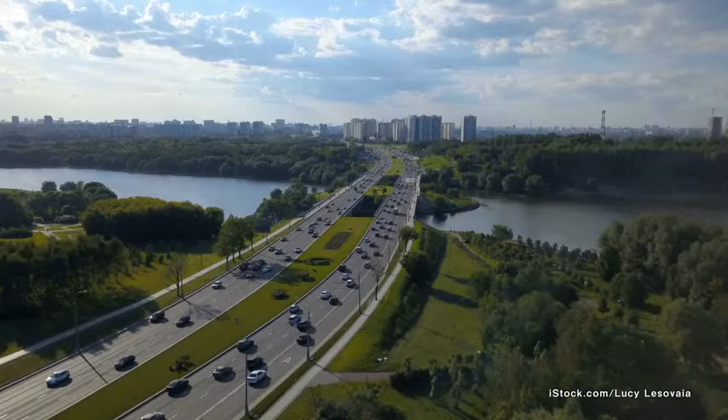Roads play a significant role as part of essential and basic social infrastructure for livelihoods and economic activity. Coupled with other environmental improvements, road infrastructure has invigorated economic activities and dramatically enhanced people's daily lives.

As part of JICA's aim to build foundations that improve user safety and amenity and support economic activities in developing countries, it has supported numerous road developments, including main road repairs, grade separation at intersections, and bridge construction and replacement.

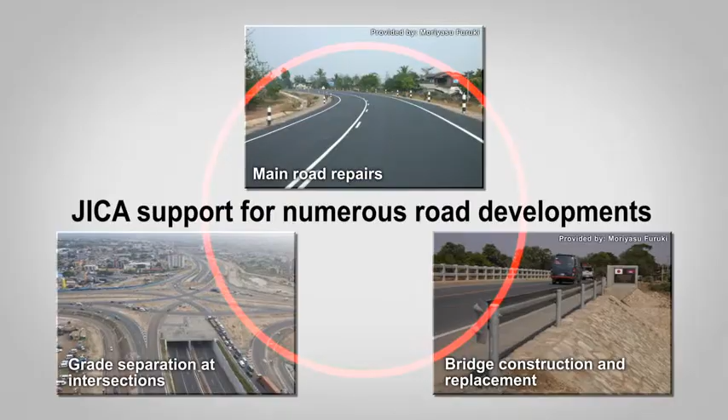Road pavement consisting of an asphalt mixture or concrete slabs not only distributes and transmits weight of vehicles as heavy as 50 tons to the soft ground, but also allows for smooth and safe driving on a flat surface.

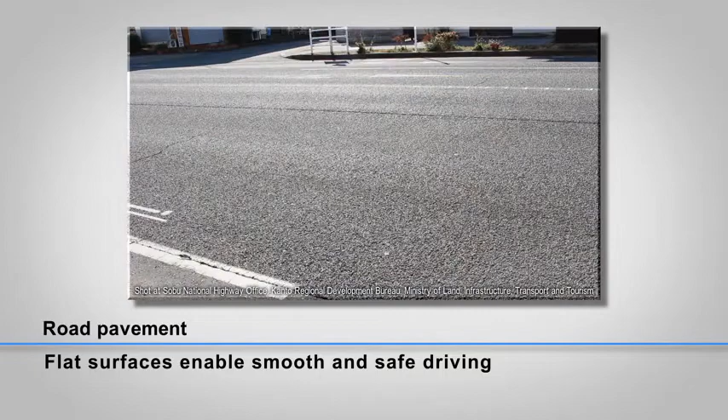To achieve these objectives, asphalt pavement consists of a surface course and binder course made of an asphalt mixture, and below that, a base course and a sub-base course. It is the subgrade that supports these pavement layers. Road design in Japan defines the subgrade as being up to a depth of 1 meter below the pavement.

Similarly, concrete pavement consists of a cement concrete slab and a base course overlaying a subgrade.

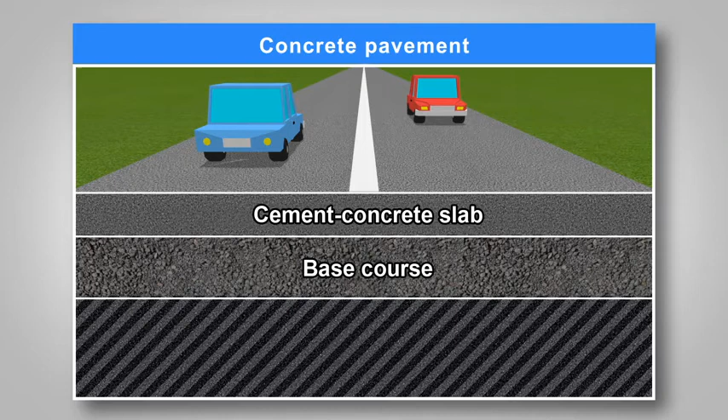Road pavements, which support the heavy traffic of today, are damaged by vehicle traffic, freezing and thawing, rainwater, etc., and their service performance gradually declines. Developing countries often experience harsh natural conditions and traffic conditions, resulting in early pavement damage and impaired ability to carry traffic.

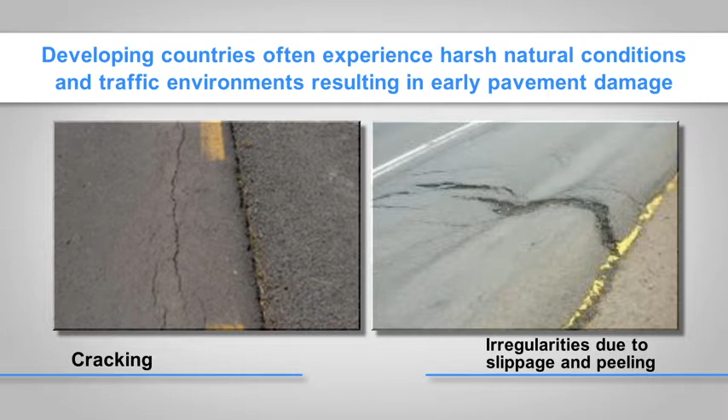Examples in the case of asphalt pavement include surface cracking, irregularities due to slippage and peeling, alligator cracking arising from interconnected cracking, and potholes in the pavement surface.

Typical road pavement includes asphalt pavement and concrete pavement. But in developing countries, with the need for rapid road development and numerous opportunities for widening existing roads, asphalt paving, which is faster to construct, is preferred.

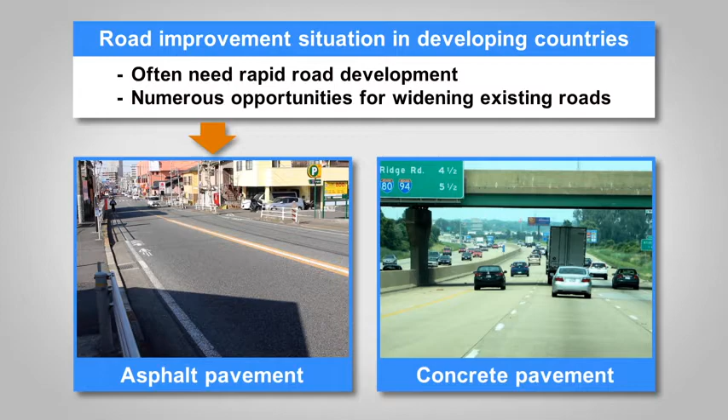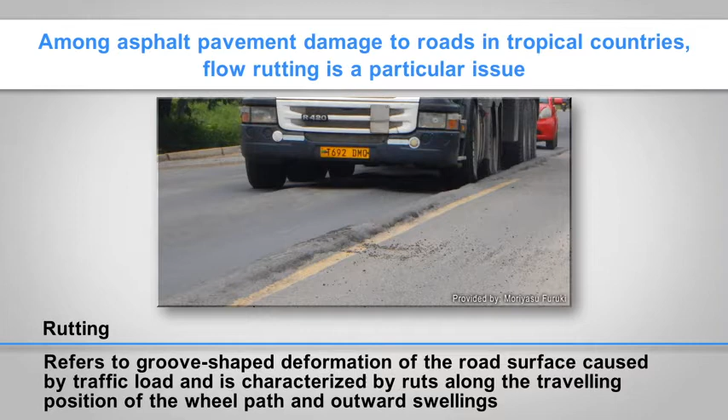Among asphalt pavement damage to roads in tropical countries, flow rutting is a particular issue. Rutting refers to groove-shaped deformation of the road surface caused by traffic load. It is characterized by ruts along the traveling position of the wheel and outward swellings. It is a problem that appears sometimes as early as a few months after completion of the asphalt paving.

The asphalt mixture that makes up the surface course and binder course is produced by mixing asphalt and filler with aggregate, such as crushed stone and sand. There are times, however, when traveling vehicle load causes the asphalt mixture laid on the road to deform like soft candy. This condition is known as flow rutting.

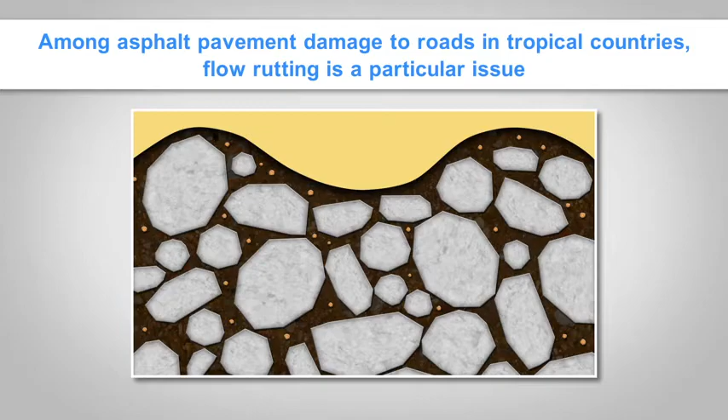Why does flow rutting occur?

Determining distribution of aggregate gradation and asphalt type and content in the asphalt mixture is called the mix design. Sometimes, however, there are inappropriate mix designs or inadequate quality control at the asphalt mix manufacturing plant. For external factors, the most common causes are intense stress on the road surface due to heavy traffic and softening of the asphalt caused by high temperatures.

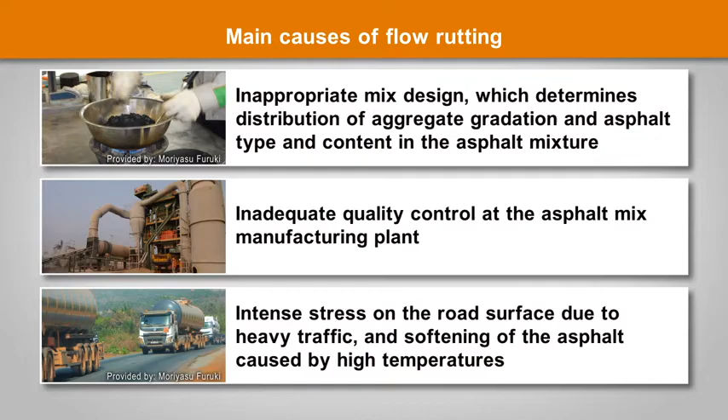For tropical countries, solving this flow rutting problem is a matter of urgency in order to make vehicle travel safe and comfortable.

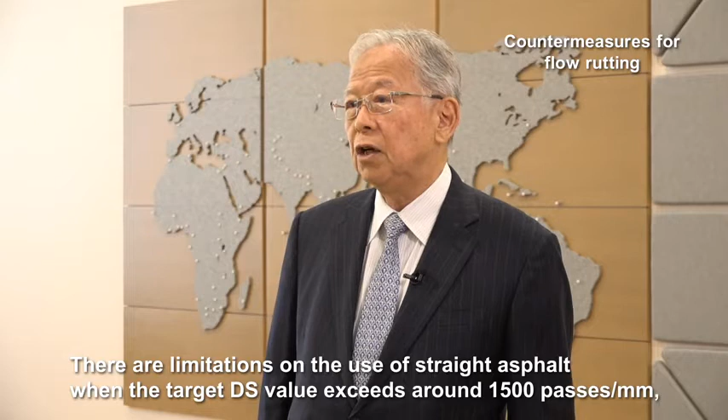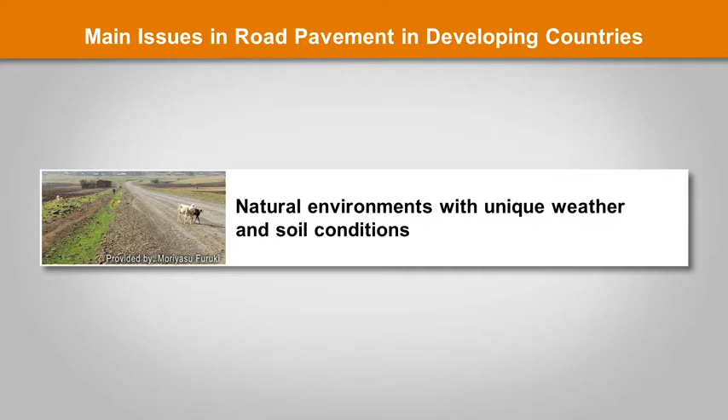Main roads in many developing countries experience natural environment conditions with unique weather and soil conditions, including temperature and rainfall, and traffic conditions such as increases in large vehicles and traffic volume. In some construction circumstances also, it is sometimes difficult to secure materials of consistent quality.

In terms of design, the design standards adopted in the partner country are not always adequate from the perspective of preventing flow rutting.

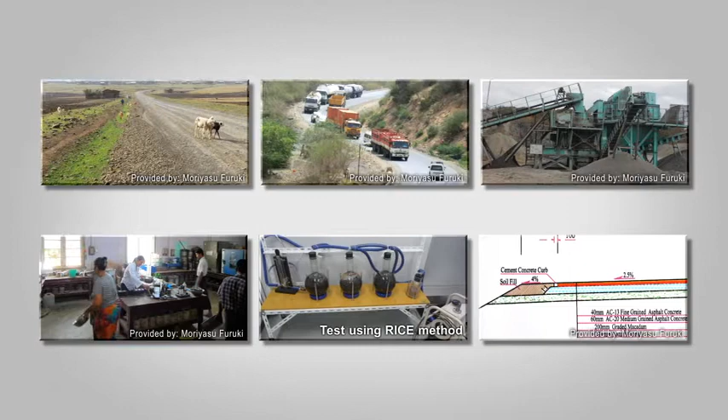In addition, taking percentage of air voids, for example, even if a test exists with the same name, the definition may vary. Or, like drainage design, measures differ by country. Unexpected pavement faults and damage could result if the partner country's natural and social environments, design philosophy and operation methods are not adequately understood.

To address these issues, it is desirable to conduct preparatory surveys for design standard features and differences in design and construction conditions in developing countries, and take appropriate measures at the design and construction phase.

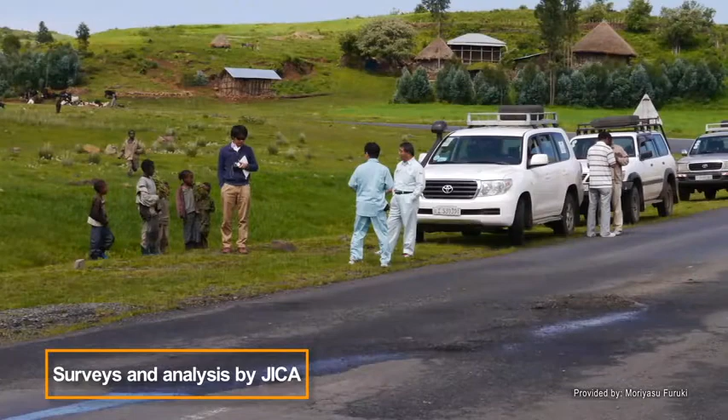To this end, JICA has implemented comprehensive surveys and analysis of the types and causes of pavement damage in various developing countries, and has conducted basic research to improve rut resistance. JICA compiled the information and knowledge gained from these projects, and in February 2020, made proposals in the form of the Road Pavement Handbook for JICA Grant Aid projects.

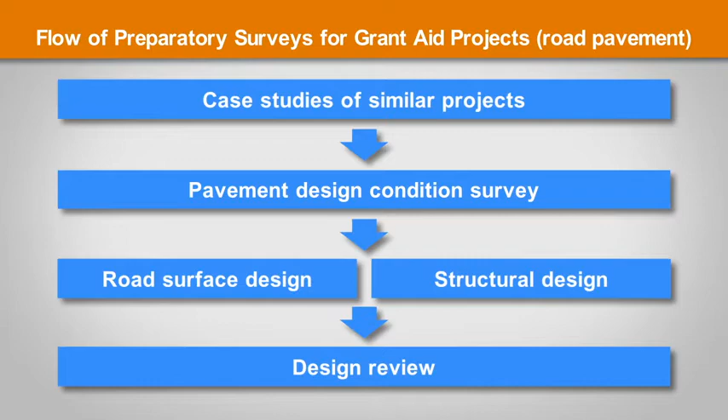Among preparatory surveys for grant aid projects, those relating to road pavement are generally implemented in the following sequence: data collection of similar projects, and pavement design conditions survey, road surface design, structural design, and design review.

In a pavement design conditions survey, local conditions, related pavement materials, and information from similar projects are collected, and the necessary investigation for pavement design is conducted, enabling a design that considers factors such as soil conditions.

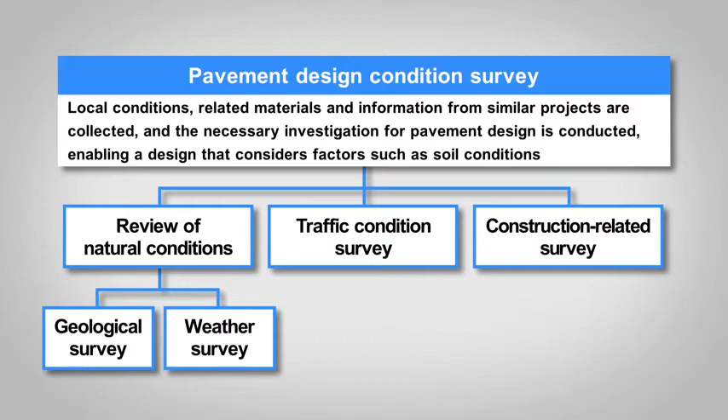Survey items include a review of natural conditions, including geological and weather surveys, traffic conditions, and a construction-related survey. Apart from calculating the California Bearing Ratio, CBR, of the subgrade, the geological survey checks groundwater level, the existence of problem soils such as dispersive soil and expansive soil, and soft ground.

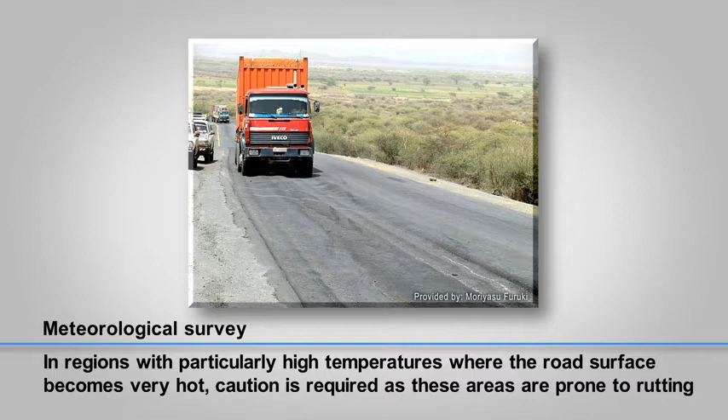The weather survey covers rainfall and temperatures in the project area. In regions with particularly high temperatures where the road surface becomes very hot, caution is required as those areas are prone to rutting.

The traffic condition survey covers traffic volume, travel speed and axle load on the target roads, and estimates future traffic volume. Caution is required in developing countries where there is a particular tendency towards a drastic increase in the volume of large vehicles.

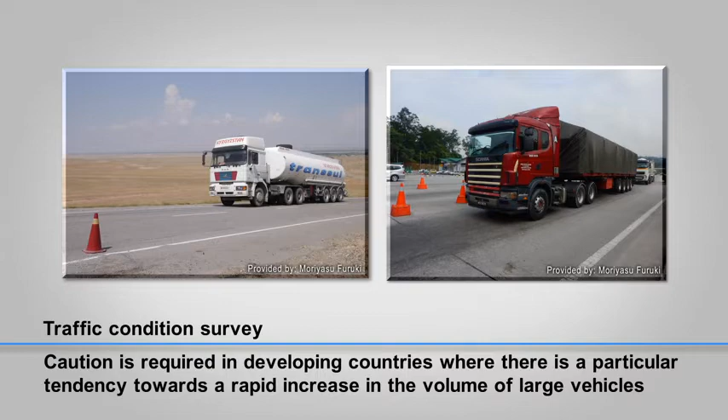The construction-related survey covers a site survey and local contractor interviews regarding paving materials, such as aggregate, that are locally accessible, and available asphalt plants.

In the design of asphalt pavements for tropical countries, flow rutting is the main issue for road surface damage, and poor drainage is the main issue for structural damage.

Road surface damage can be prevented by clarifying the required performance for the road surface at the road surface design stage, selecting asphalt and making decisions on surface course materials, including the necessity for modifiers, aggregate quality and gradation to satisfy this performance, and then designing and manufacturing the mix.

The term road surface design refers to one of the unique features of pavement design in Japan.

Structural damage first requires appropriate implementation of design condition surveys, including CBR tests and axle load surveys. Then, based on the traffic load, subgrade conditions, climate conditions, and material conditions obtained from these surveys, structural calculations are made to satisfy the specified strength throughout the specified design period, and a structural design that appropriately determines material and thickness for each pavement course is conducted.

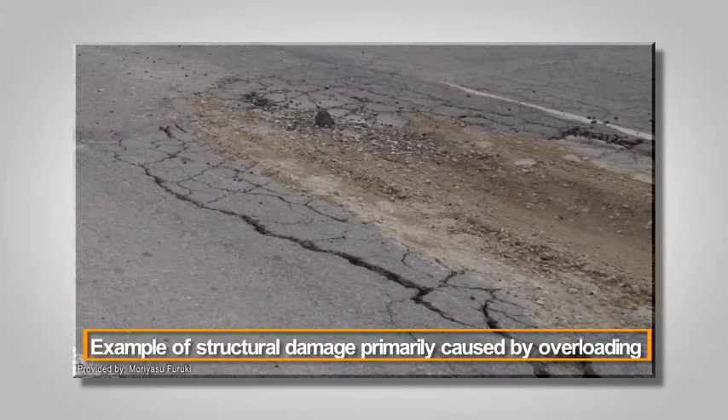Even with proper design, repeated heavy traffic over a long period can cause fatigue failure in the pavement. Groundwater and inappropriate maintenance also allow intrusion of water into the pavement from pavement cracks or gutters. This results in loss of bearing capacity of the base course and subgrade, leading to damage.

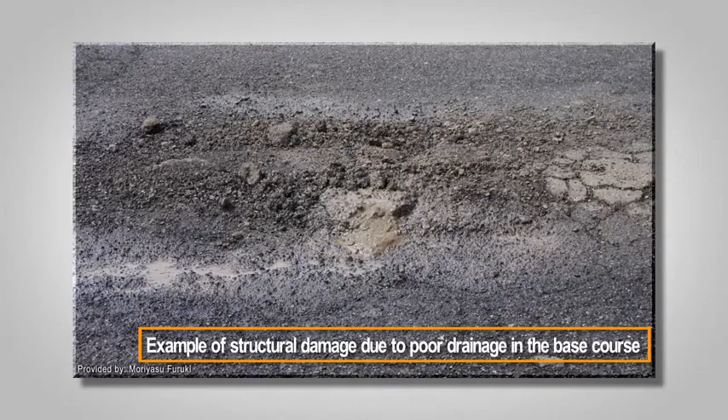Within pavement design, it is road surface design that is most important to counter flow rutting. At JICA, we recommend using dynamic stability, target DS value, which is commonly used in Japan as one of the standard performance indicators against flow rutting of pavement.

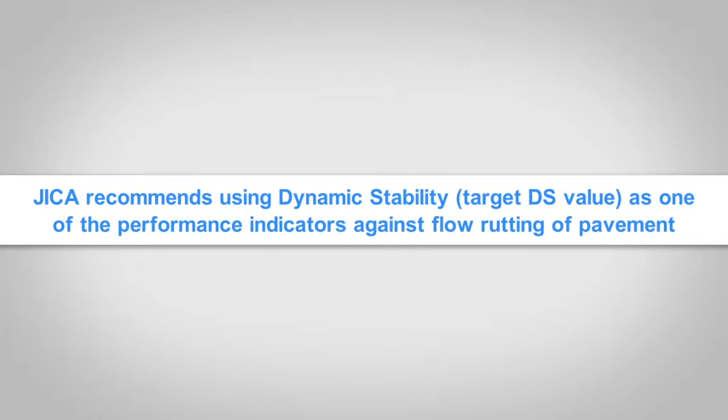This is a method to obtain target estimated DS values based on actual results in Japan using the target amount of rutting and service period, and external factors such as heavy vehicle traffic, wheel load, driving speed, road surface temperature, etc., and to refer to them when designing the asphalt mix.

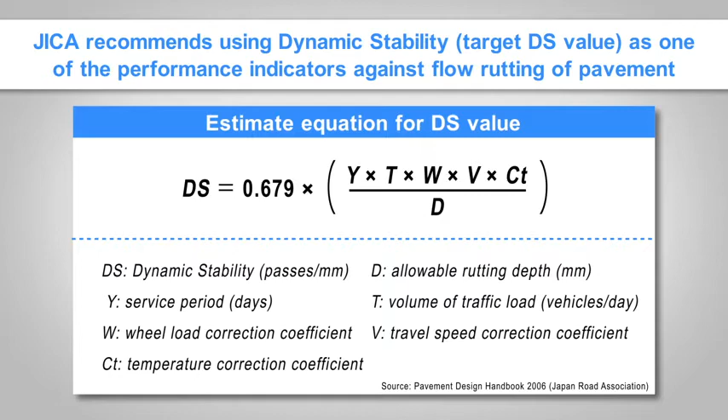In addition to the estimated DS value calculated in this way, the target DS value is determined based on a comprehensive judgment that takes into account information on the pavement of surrounding roads and special circumstances such as heavy vehicles entering and exiting from roadsides and local traffic congestion.

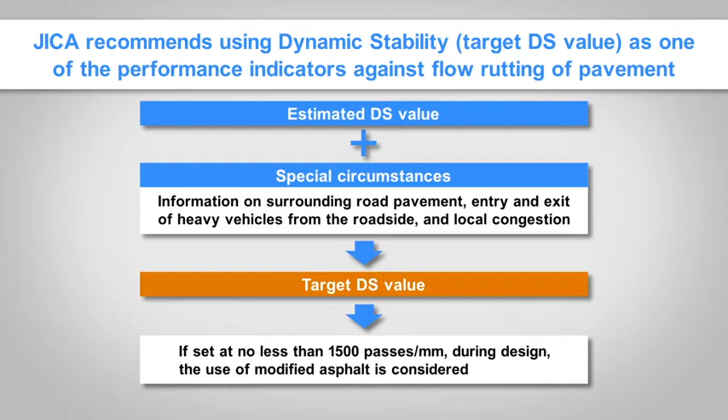Based on this, when the required performance, target DS value, is set at no less than 1500 passes per millimeter, during design, the use of modified asphalt is considered.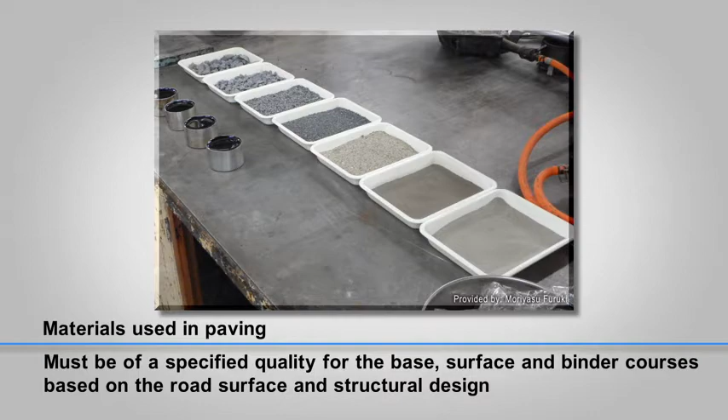Materials used in paving must be of a specified quality for the base and sub-base course, surface and binder courses based on the road surface and structural design. For that purpose, at the construction preparation stage, the construction contractor will implement material tests, mix design, and construction management.

In order to ensure that the asphalt mixture exhibits the performance required in the road surface design, such as flow resistance, we need to pay attention to detail in the mix design.

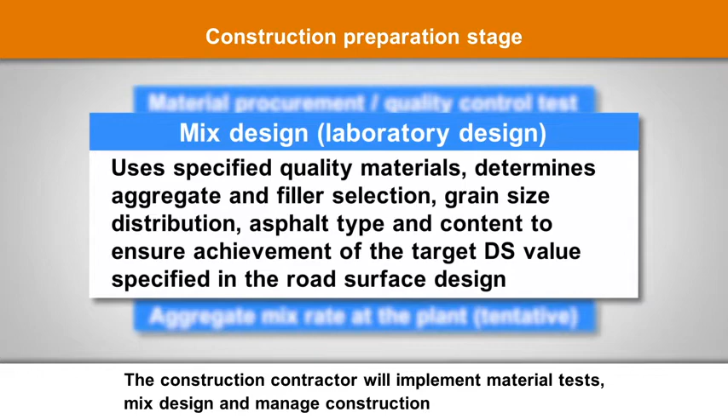The mix design uses specified quality materials and determines aggregate and filler selection, grain size distribution, asphalt type and asphalt content to ensure achievement of the target DS values specified in the road surface design.

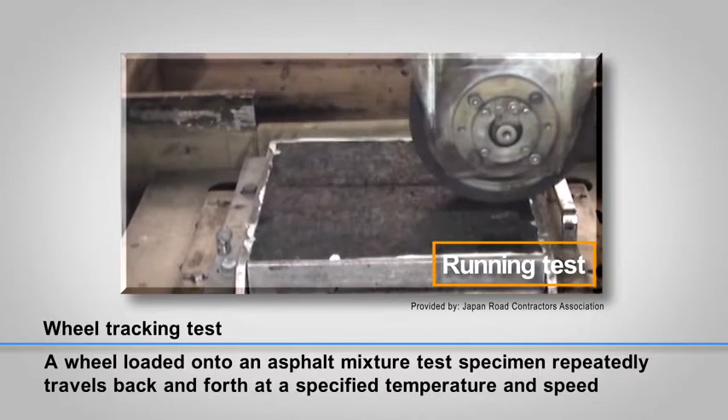Japan's mix design method is conducted as a combination of the Marshall stability test and wheel tracking test. The wheel tracking test is a test that checks dynamic stability. The test uses a small, hard rubber wheel loaded onto an asphalt mixture test specimen that repeatedly travels back and forth at a specified temperature and speed to calculate the number of wheel passes required for a 1 mm increase in rutting in the specimen.

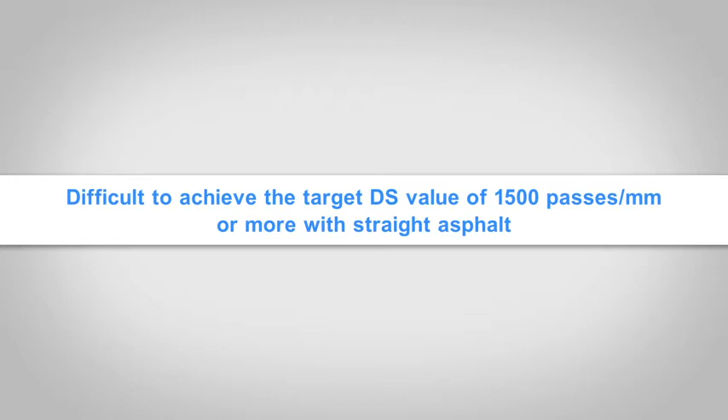Under Japan's test, it is difficult to achieve the target DS value of 1500 passes per millimeter or more with straight asphalt. However, using modifiers increases paving costs, so initially the requirement is to use given materials and increase the DS value as high as possible without compromising the workability and durability of a mixture.

In many road projects outside of Japan, pavement work costs account for over half the project costs, so economic paving is a major concern for the contractor.

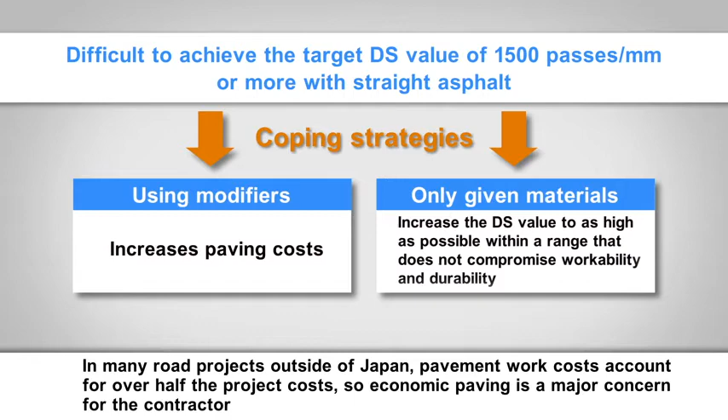The flow resistance and durability of an asphalt mixture varies considerably depending on grain size distribution in the mix. Coarse aggregate does not pass through a 2.36 mm sieve, and fine aggregate passes through a 2.36 mm sieve, but not a 75 micrometer sieve.

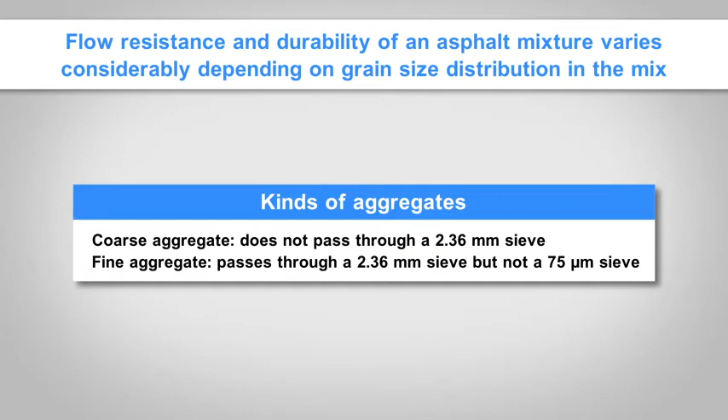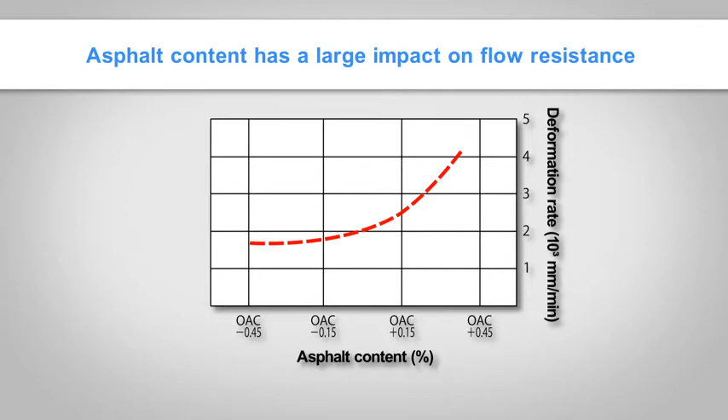and asphalt is interposed between them to make the bond strong, the mixture will be highly resistant to flow. Asphalt content has a particularly large impact on flow resistance and must not be too high. Generally, the optimal asphalt content for the Marshall stability test in Japan is likely to cause flow rutting in the tropical country's environment.

Some decrease of asphalt content should be considered. However, care must be taken because too little asphalt sometimes causes construction problems such as fine cracks and a tendency for loss of durability.

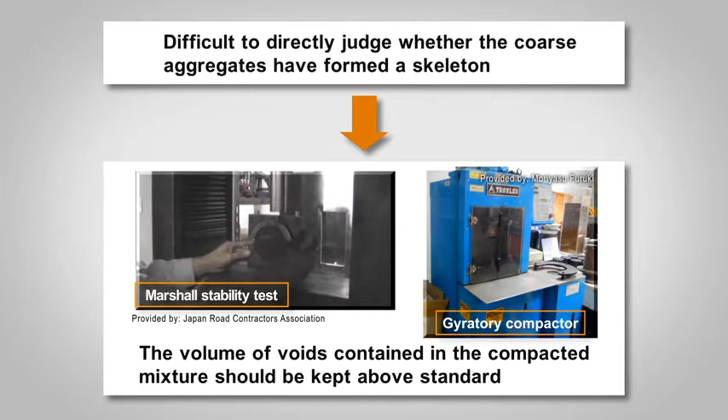It is difficult to make a direct judgment as to whether the coarse aggregates have formed a skeleton, so the volume of voids contained in the compacted mixture should be kept above standard using the Marshall stability test method or a machine called a gyratory compactor.

Aggregate shape is also important, particularly for fine aggregate. As natural sand is close to a spherical shape, its use is undesirable in terms of good flow resistance, so artificial sand should be mixed in.

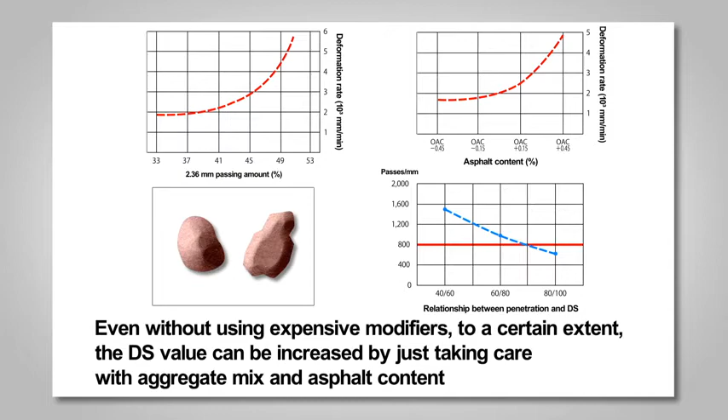In addition, it is very useful to use low penetration asphalt, such as 40 to 60 penetration. In this way, even without using expensive modifiers, to a certain extent, the DS value can be increased by just taking care with aggregate mix and asphalt content.

When wheel tracking test results do not yield the target DS value and modified asphalt is used, care needs to be taken with the type of modified asphalt and asphalt plant type.

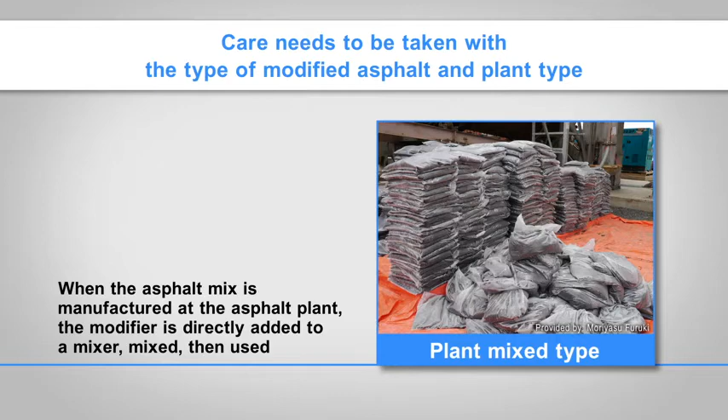There are two types of modified asphalt: premix and plant mix. The premix type is made by an asphalt manufacturer, where the modifier is mixed in the straight asphalt in advance at the plant. Conversely, for the plant mix type, when the asphalt mix is manufactured at the asphalt plant, the modifier is added directly to a mixer, mixed, then used.

When using modified asphalt, there are countries where the premix type is not available in the market. Furthermore, when considering the plant mix type, the modified asphalt manufacturing method varies depending on the type of asphalt plant.

There are two types of asphalt plants: batch type and continuous type. In Japan, batch type asphalt plants are commonly used, where each material is weighed one batch at a time in a weighing tank, and then mixed in a mixer.

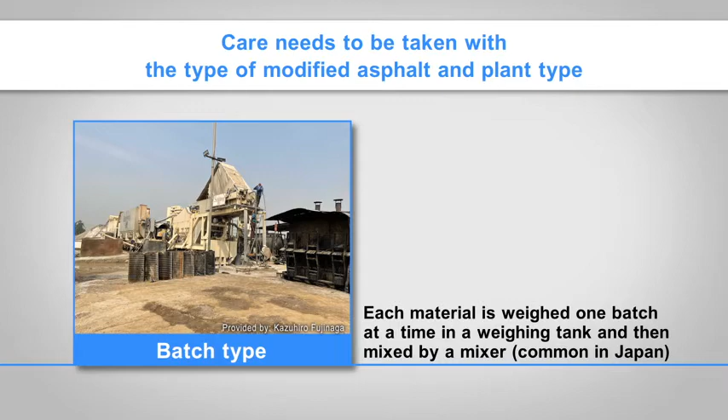On the other hand, in many African countries and Australia, the continuous type is commonly used, where each material is continuously supplied at a specified flow rate. Manufacturing modified asphalt using the continuous type requires equipment modifications.

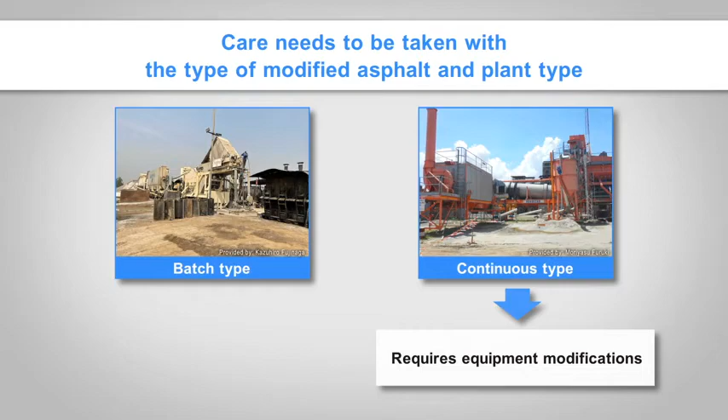Based on these considerations, when modified asphalt is expected to be used, information needs to be collected in advance, including the asphalt procurement situation at the project site and the available plant type.

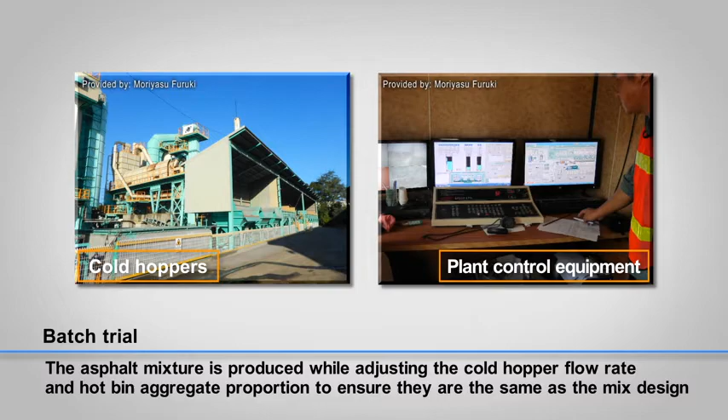Next, a batch trial is conducted based on the mix design, where an actual asphalt plant is used for a trial mix of materials. For the batch trial, the asphalt mixture is produced while adjusting the cold hopper flow rate and hot bin aggregate proportion to ensure they are the same as the mix design.

As with the mix design, the required performance tests such as Marshall stability test and wheel tracking test are conducted to confirm that the required performance is assured.

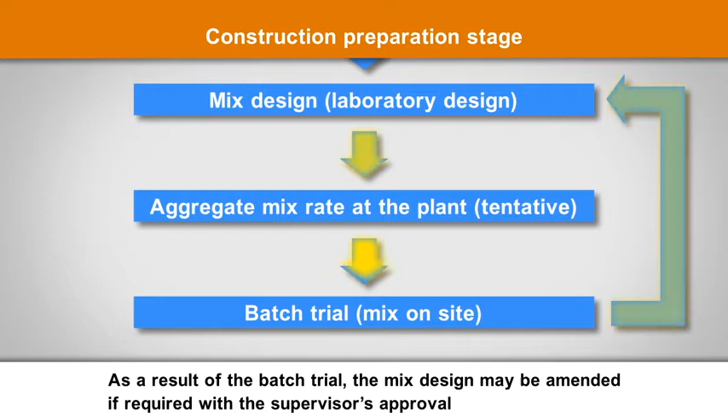As a result, the mix design may be amended if required with the supervisor's approval, and on-site mixing parameters such as plant mix proportion, asphalt content, mixing time and target temperature, as well as management targets at the asphalt plant are set to ensure a proper production system for the product.

In conjunction, trial construction is also implemented to confirm the workability and to determine the construction method and conditions. The asphalt mixture is manufactured by mixing sprayed heated asphalt with heated crushed stone, sand, filler, etc.

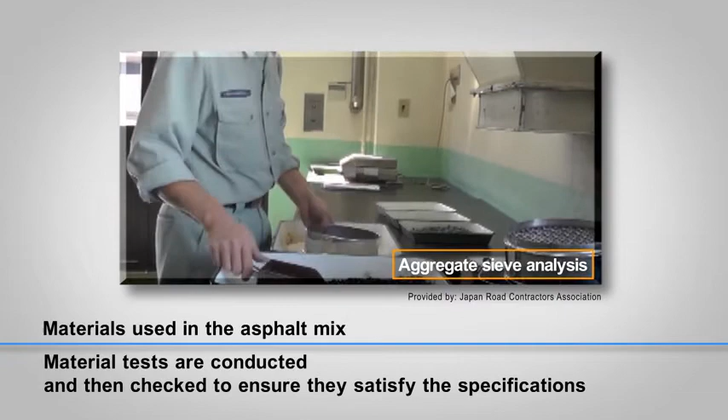Material tests are conducted on the materials used in the asphalt mix, and then checked to ensure they satisfy the specifications.

In developing countries, stone crushing plant equipment is often inadequate, leading to problems with aggregate shape or disparities in gradation and properties, depending on the quarry and the crushing plant. Careful quality control is needed using tools such as material tests.

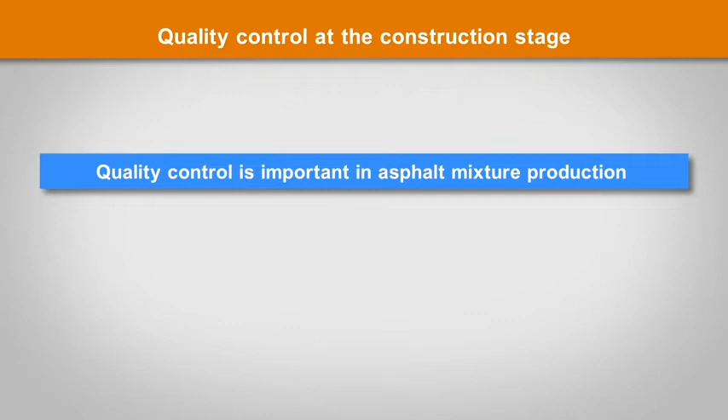When the paving works commence, quality control is important in asphalt mixture production. In particular, deviation from the specified particle size range of a specified gradation for the asphalt mix significantly impacts asphalt mix properties.

This is an example of an extraction test conducted after collecting a core sample of the asphalt layer on a road. In sections where serious defects are observed, the test results show that nearly all gradations deviate greatly from the standard.

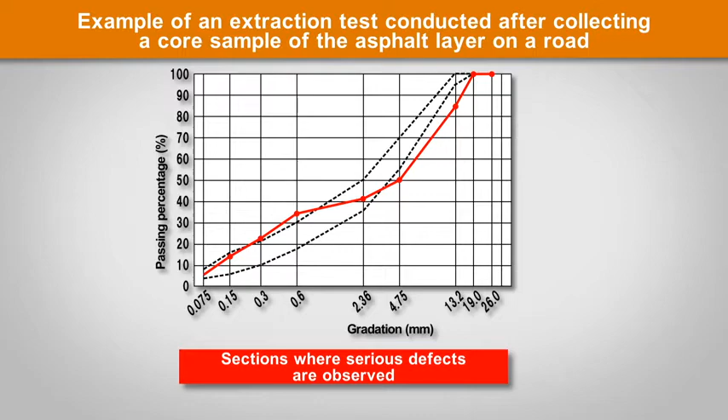This is likely due to too many fine fractions and insufficient interlocking of the coarse aggregate. In sections maintaining a favorable state, gradation is largely within range.

As this example shows, an increase in fine fractions causes a major reduction in flow resistance. The out-of-scope grain size distribution in this example is thought to be caused by inappropriate control at the asphalt plant.

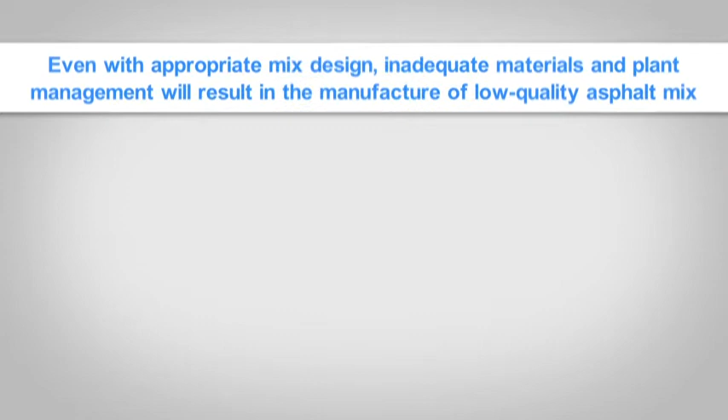This demonstrates that, even with appropriate mix design, inadequate materials and plant management will result in the manufacture of low-quality asphalt mix. To address these issues, under grant aid projects, specialists with appropriate plant management experience and skills are assigned, and the contractor takes responsibility for managing the asphalt plant.

Asphalt plant management can be broadly divided into periodic management and routine management.

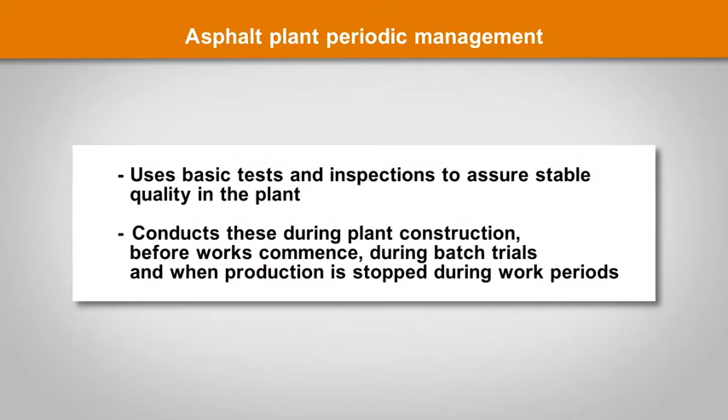Periodic management uses basic tests and inspections to assure stable quality in the plant, and conducts these during plant construction before works commence, during batch trials, and when production is stopped during work periods. Control items include inspection of asphalt plant equipment, such as measuring devices, cold hoppers, thermometers, and asphalt discharge equipment. Items outside of routine management are also conducted, such as checking properties of aggregate gradation and asphalt property tests.

In routine management, based on data obtained during periodic management, we confirm that errors are within the acceptable range and that there are no changes or abnormalities in the asphalt plant production processes, materials, or produced mixture. Routine process checks include inspection of equipment and operation control points prescribed in the quality control standards through visual inspection before and during work.

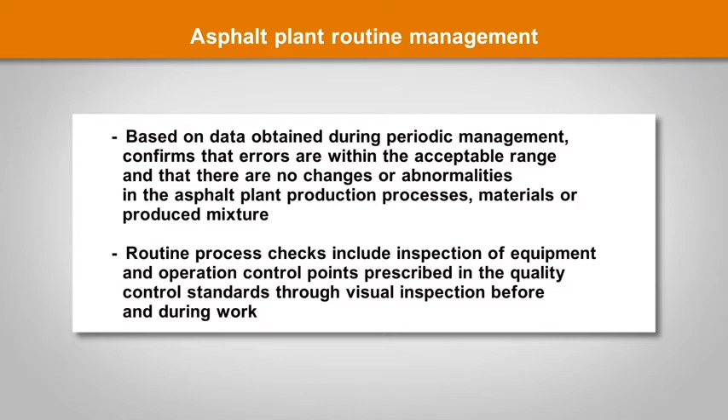Control items include sieving tests of hot bin aggregate, moisture content tests, extraction tests to investigate mix gradation and asphalt content, and temperature measurement of the produced mix. Daily performance of these tests reveals fluctuations in the produced mix. For example, it enables detection of clogged or broken screens used for aggregate sieving.

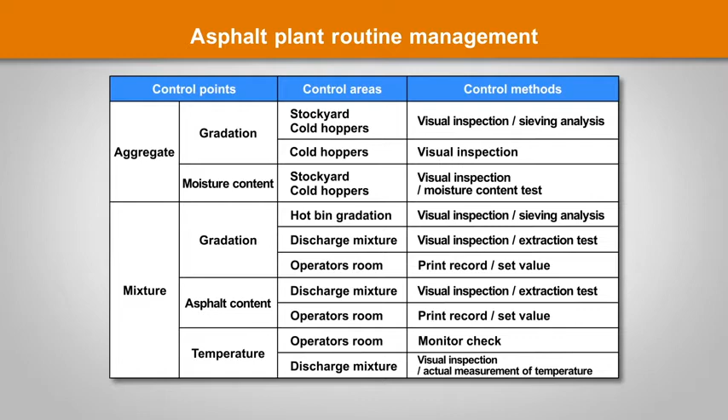Please refer to the Road Pavement Handbook for JICA Grant Aid Projects, which details items to note in relation to plant management.

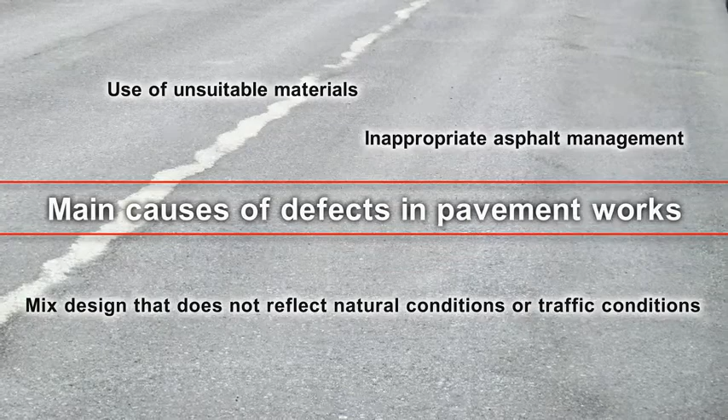Pavement works defects under grant aid projects are mainly caused by use of unsuitable materials, mix design that does not reflect natural conditions or traffic conditions, and inappropriate asphalt plant management. These factors demonstrate the importance of creating an organization capable of technical and quality control of paving and assignment of professional pavement engineers.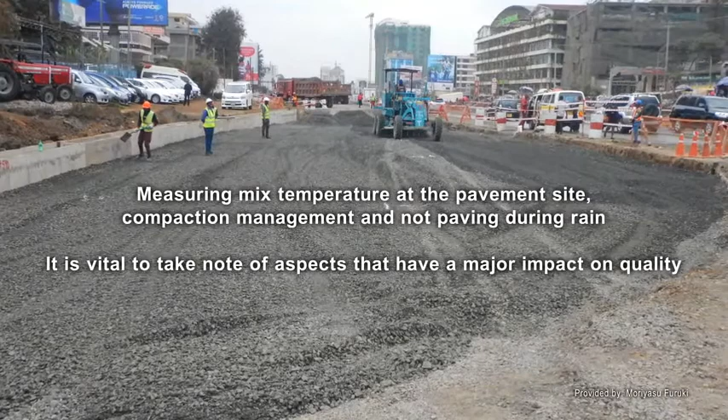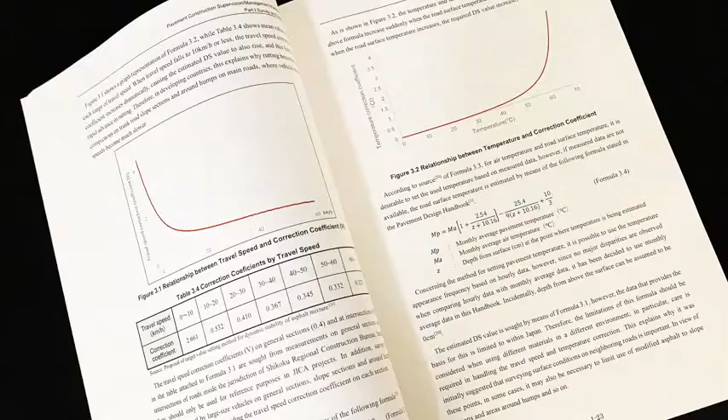Apart from these, it is vital to take note of aspects that have a major impact on quality. These include measuring mix temperature at the paving site, compaction management, and not paving during rainfall, etc. However, countermeasures for these have subsequently been promoted on site. JICA has compiled findings on these topics and produced a road pavement handbook that reflects these issues. We anticipate that by referring to this handbook, and in conjunction with new technological developments, such problems can be avoided in the future.

Under JICA grant aid projects, the consultant acts as an agent for the implementing organization and oversees whether the contractor is constructing according to the contract, work specifications, and design drawings. The consultant also ensures that appropriate quality and works timelines are met through construction management aimed at the contractor creating effective roads that meet specified quality standards.

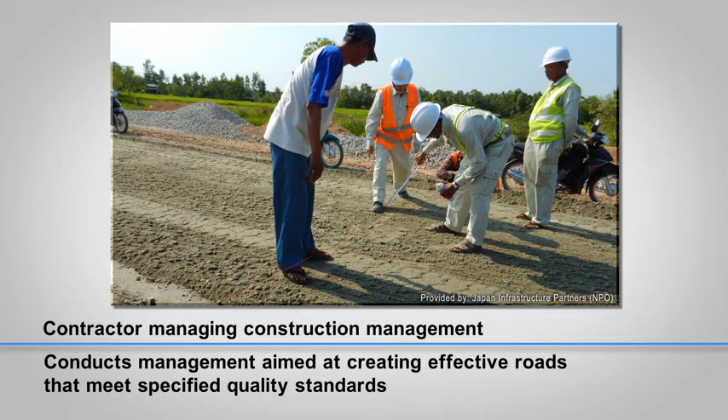In recent years, there have been further efforts to improve quality and enhance construction supervision and management through the introduction of joint meetings called Works Quality Control Meetings, attended by the client, JICA, the consultant, and contractor.

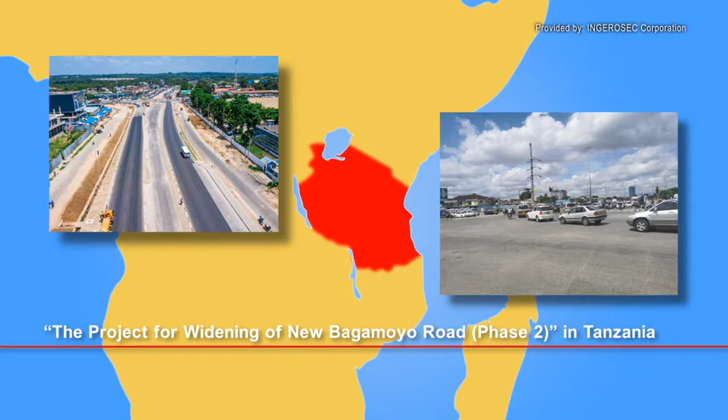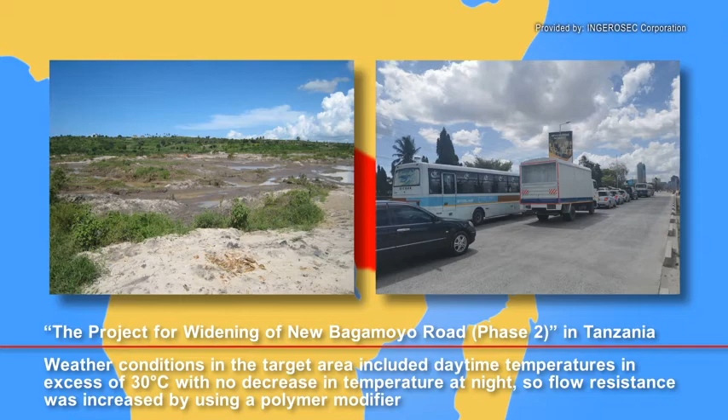Countermeasures to prevent flow rutting in this project included local collection of asphalt pavement materials to be used on site and wheel tracking tests in Japan, which enabled understanding of actual material quality and investigation of test methods. Weather conditions in the project area included daytime temperatures in excess of 30 degrees Celsius, with no decrease in temperature at night. These are harsh conditions for asphalt, so flow resistance was increased by using a polymer modifier.

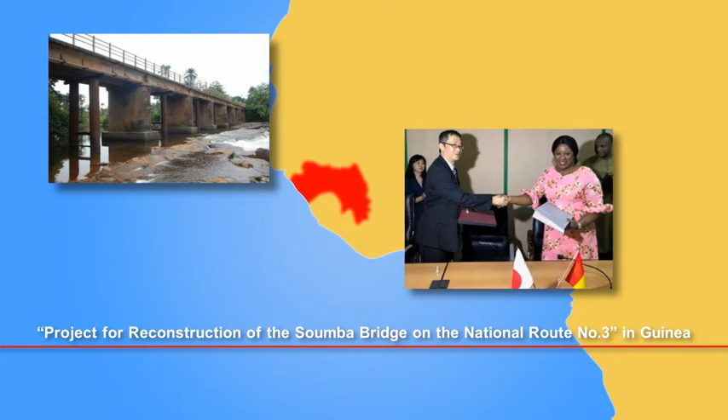In July 2019, JICA signed a grant agreement with Guinea for grant aid for the project for reconstruction of the Soumba Bridge on the National Route No. 3. As Guinea did not have standards to counter flow rutting, an investigation was conducted on flow resistance countermeasures under Japan's road pavement technical guidelines. Due to the high volume of heavy vehicle traffic on the Soumba Bridge, a modified asphalt was used for the approach road sections and bridge surface pavements.

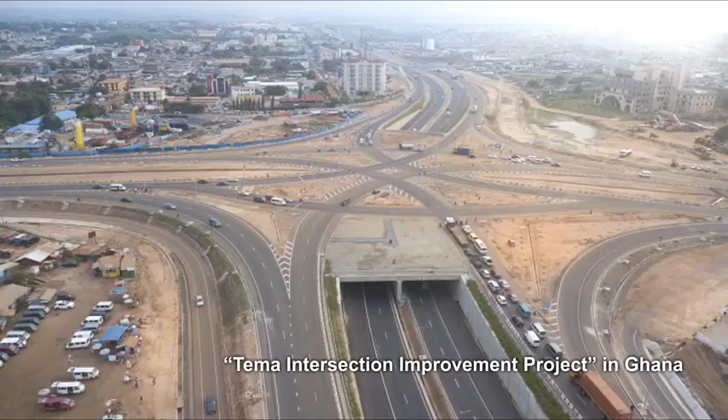Roads are a particularly important part of social infrastructure, and as such, they will continue to be qualitatively and quantitatively improved.

Road pavement could be described as the face of road infrastructure, and it plays a vital part in road quality felt by users. It is also responsible for the final finish of road projects.

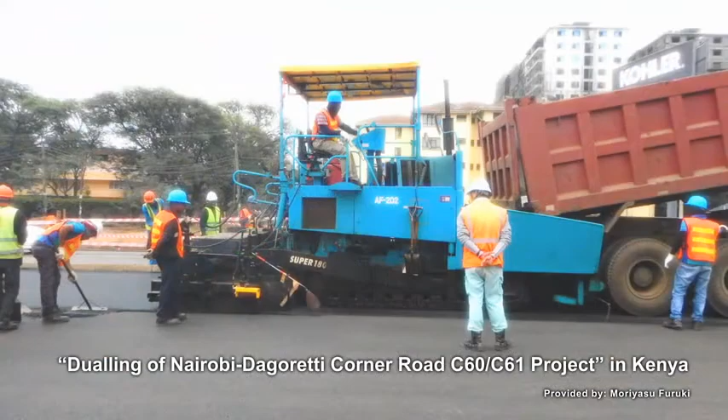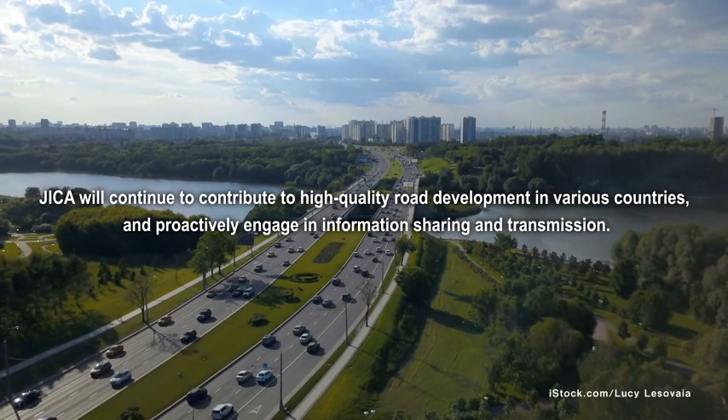JICA will continue to contribute to high-quality road development in various countries by further preventing damage to road pavement and improving its quality, and in particular by analyzing data and collecting findings on flow rutting countermeasures. We will therefore proactively engage in information sharing and transmission with associated parties and organizations.